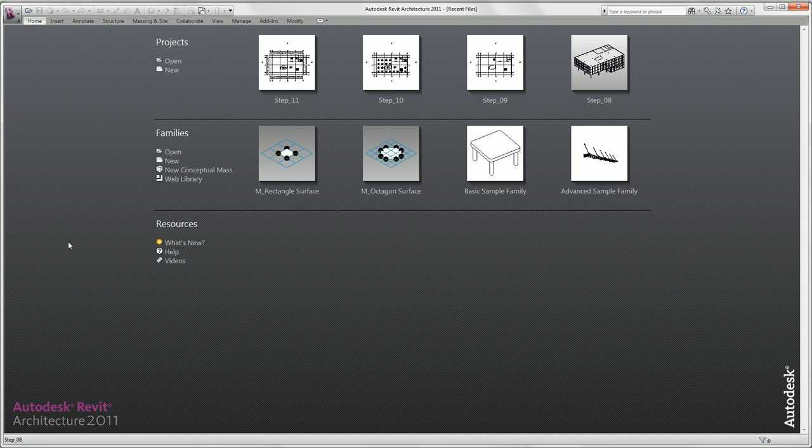In this step, we will create a view template and place the views on our sheet. So now first we'll hide our elevation symbols: select them, right mouse click and hide category.

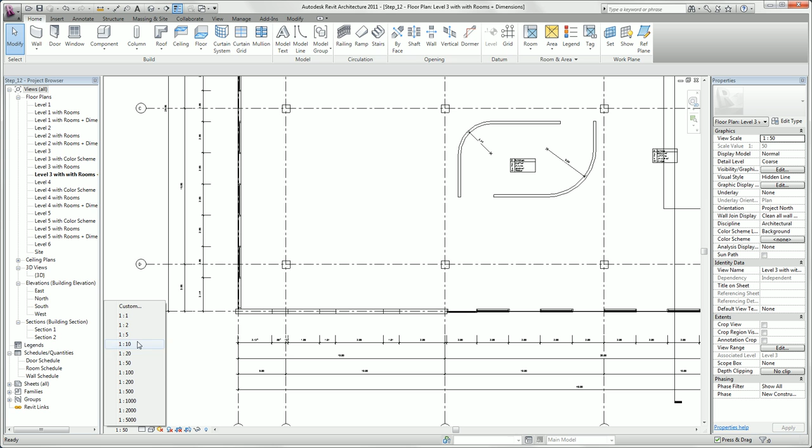Now we change the scale in our view control bar to 1 to 100 and set our detail level to fine. We want to save this graphic style, so we right click on our level 3 view and select create view template from view.

We put in here view MPK. If we want, we can apply further changes here. We just click OK.

Now we will apply our graphic style to two other views, so we select level 4. With the right click, we click on apply view template and select view MPK.

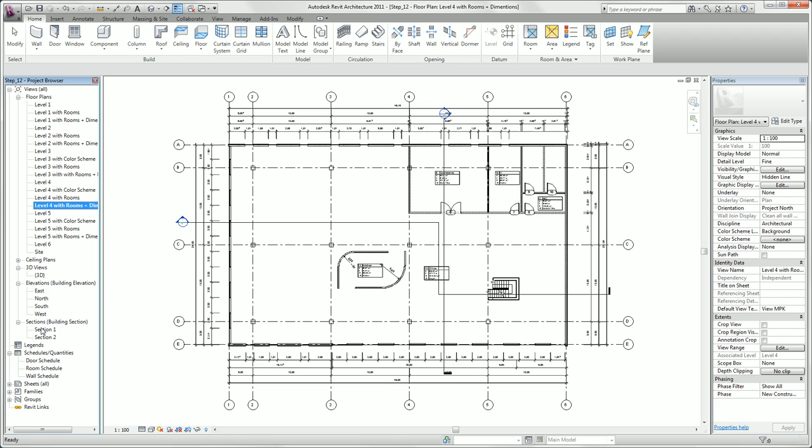We'll repeat this in our section 1. With the right mouse click, we click on apply view template. We change our selection to all and select view MPK.

Now we switch into the south view. Always remember that in Revit every view has extents, which you can modify. This is necessary when you like to place views on your sheets.

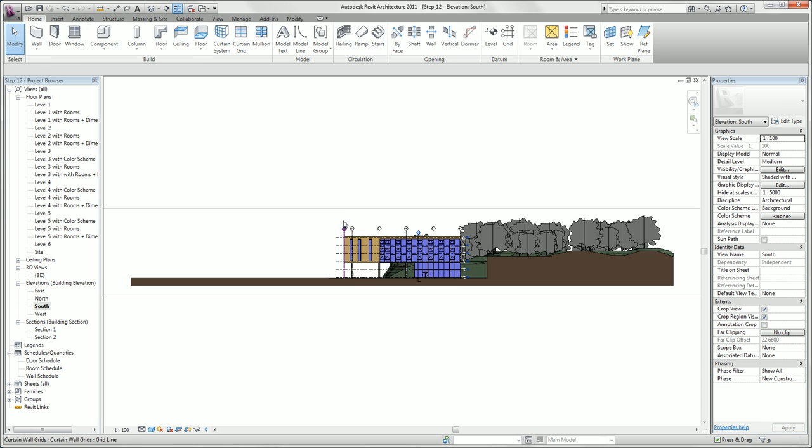Select here in the view control bar, show crop region. We select our boundaries, and with the blue triangles we crop our view.

If we want to hide boundaries of our view, we select hide crop region in our view control bar.

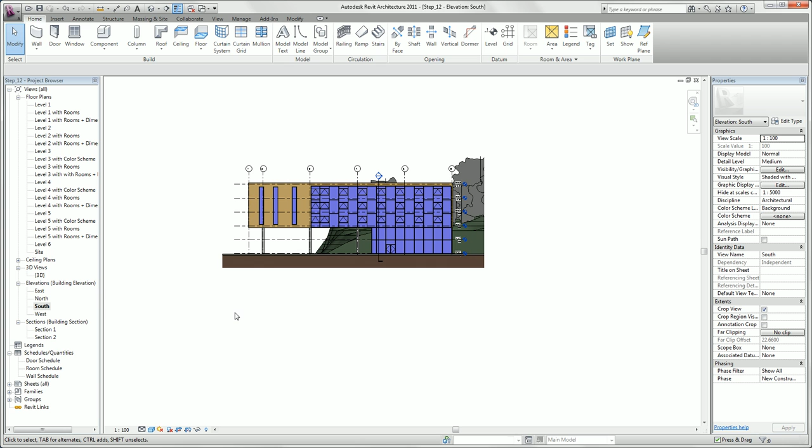Now we also have the possibility to hide our grid and our elevations. So we select one level and use shortcut VH to hide the category. Repeat this with our grid lines, VH shortcut, and we also will hide our section. Now we are done with that.

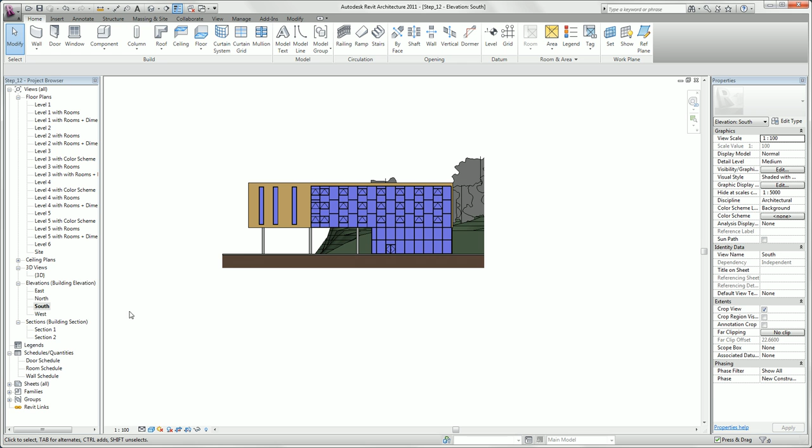We also want to create a perspective. We switch to our site view. In our view tab, we select camera.

Set the camera, and here we have our first perspective. That looks really nice. We can modify the boundaries.

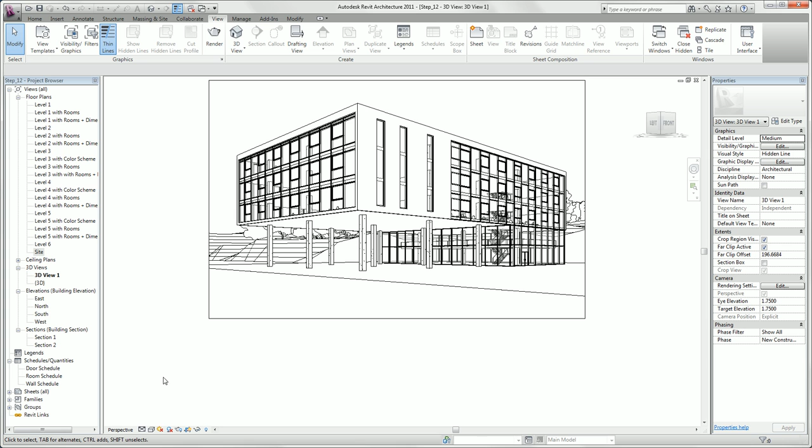And now we can place all of our floors, sections and perspectives on our sheet. So we select one of our sheets, sheet A0, and we place level 3 with room and dimension on our sheet.

Now we also place section 1 and the perspective on our sheet. We see here a snapping line which helps us align our views. Now we place our perspective.

We can modify the size of our perspective. Click here size crop, select scale locked proportions, and change the width to 300 millimeters.

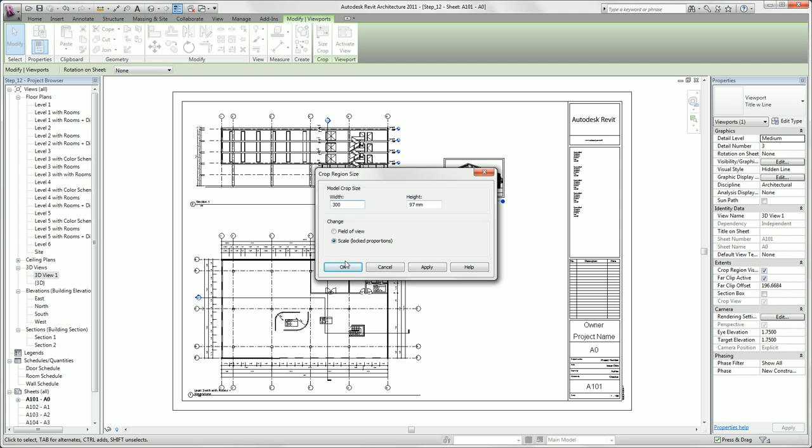Revit automatically generates a tag, and we have the possibility to change that. We can select here title and no line.

We can also use the guide grid to align our views. Click it, now we can move our views. If we are satisfied with our sheet layout, we can delete our grid. We select it and delete it.

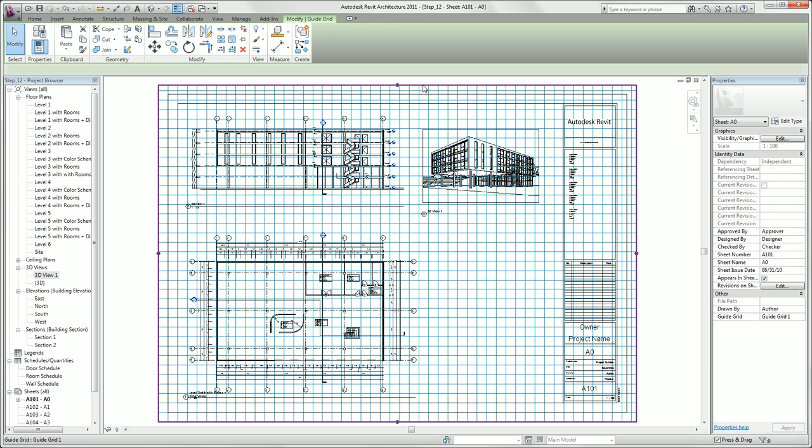Now we want to activate one of our views. If one of the views is activated, you have the possibility to make changes in that view.

So we select our first grid line and also select all of our dimensions on the left side. Now we move our first grid line to the left a little bit, and you see all the changes have been applied to our section, our 3D view, and our level 3 plan. We want to undo those changes and we deactivate our view.

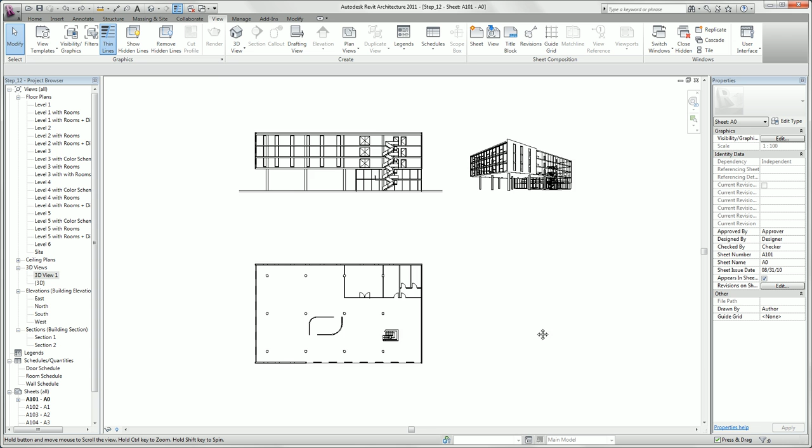Now we want to make some changes in our title block. We zoom in. We change the owner to Autodesk and the project name to Bumblebee. We click somewhere else and the changes have been applied to all of our sheets.